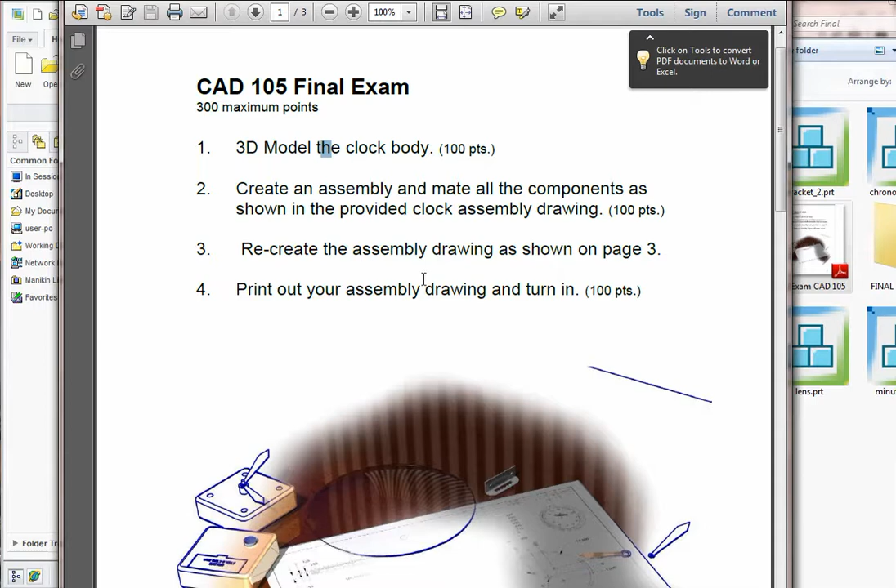The instructions are: model the 3D clock body with 100 points, create an assembly and mate all the components as shown, and recreate the assembly drawing shown on page 3. Print it out and turn it in.

So here is the clock body. You can see it's a little bit more detailed than what we worked on in the past with our midterm, but nonetheless it's not much more challenging. There's just a couple extra things to do on here.

So what we're going to do is we'll begin with that, then we'll assemble it as shown here and make this drawing.

To start off with, let's go ahead and create the clock body. The outer diameter is 8 inches, and it's going to be 0.75, so 3/4 of an inch thick. And it'll have a hole that's a 1/2 inch diameter through in the center. So start with the new part, and we'll call this the clock_body.

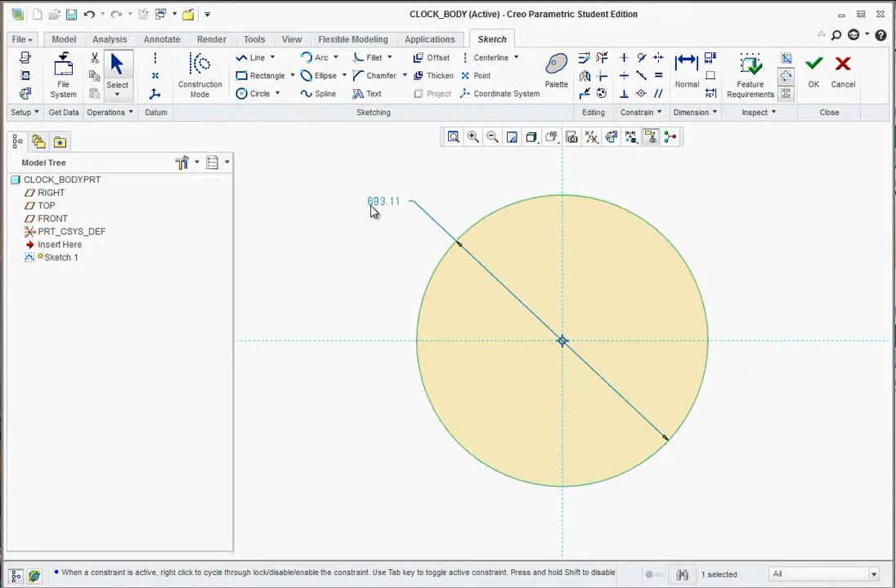Hit OK. Select the front plane for this one and start a sketch. Go to the front view orientation and proceed to sketch 2 circles. Go with the center and point circle. Draw out a large diameter there, and that's going to be 8 inches. Then draw a smaller diameter in the center, which is just 0.5.

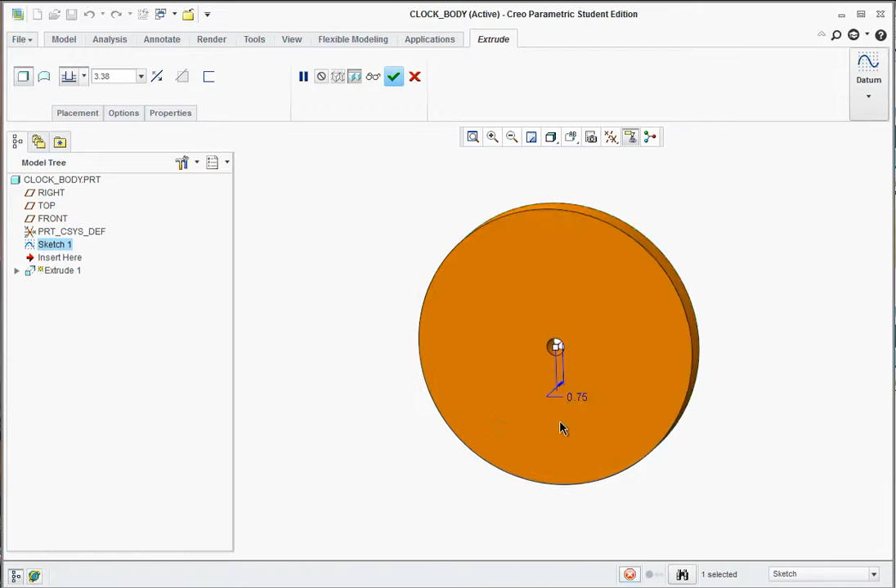Now you can extrude that, so hit OK. Go to Extrude Boss, refit here, and it only gets extruded 0.75 deep. Hit Apply. Right away, it's a good idea to put the fillet on, or the round. Click on the round, and the round is going to be 0.25. Select the outer edge, and apply.

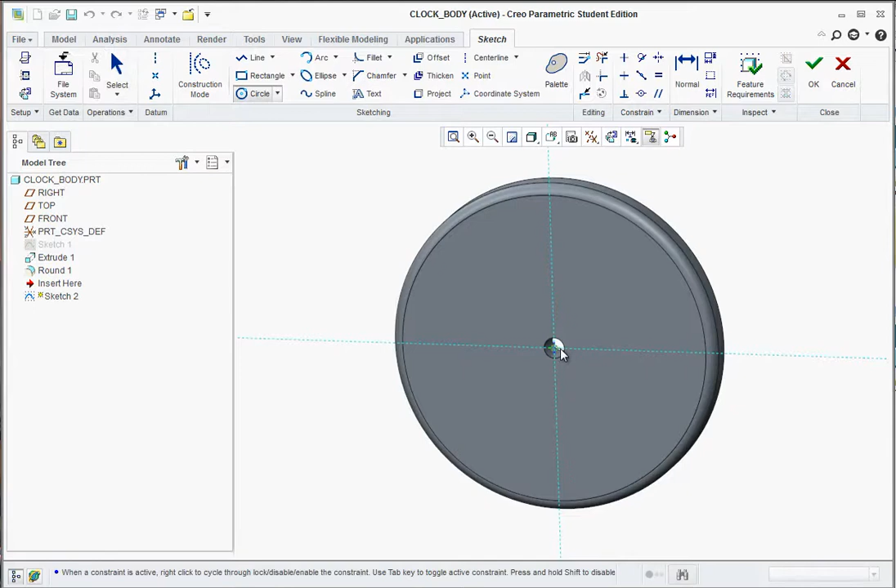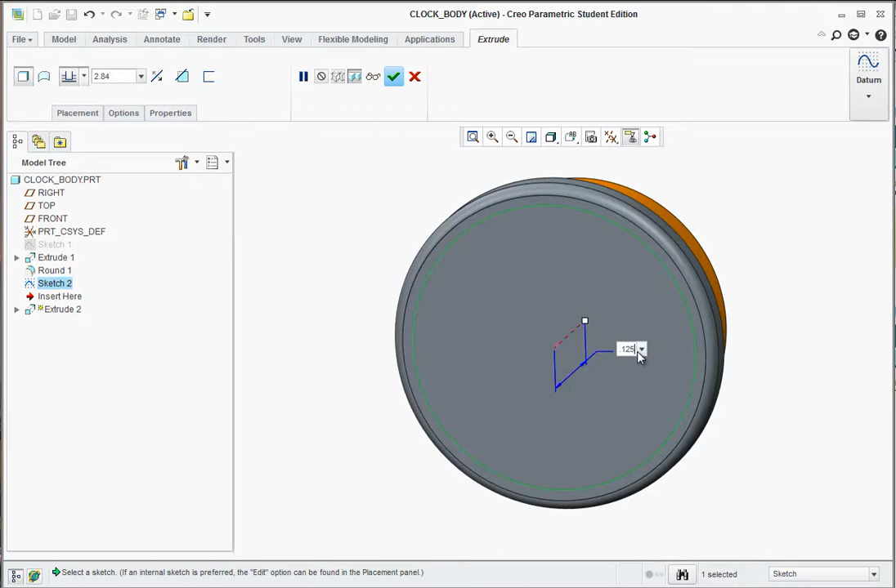Now select this face on the front and start a sketch. Draw the next diameter, which is 7.5 inches. And that gets extruded as a cut. So go to Extrude, reverse it, and we'll have to look at the print for that - it identifies it as 0.125 deep. So 0.125, and remove material. Let's try again, 0.125, hit enter to have it update, and the green check mark to apply.

The next diameter we're going to create on here is going to be 6.5 inches. It's going to be another depth. In this case, from the 0 marker, which is the very front face, it's going to be a 1/2 inch deep. So make sure it'll be 0.375 in the event that you have to subtract 0.125.

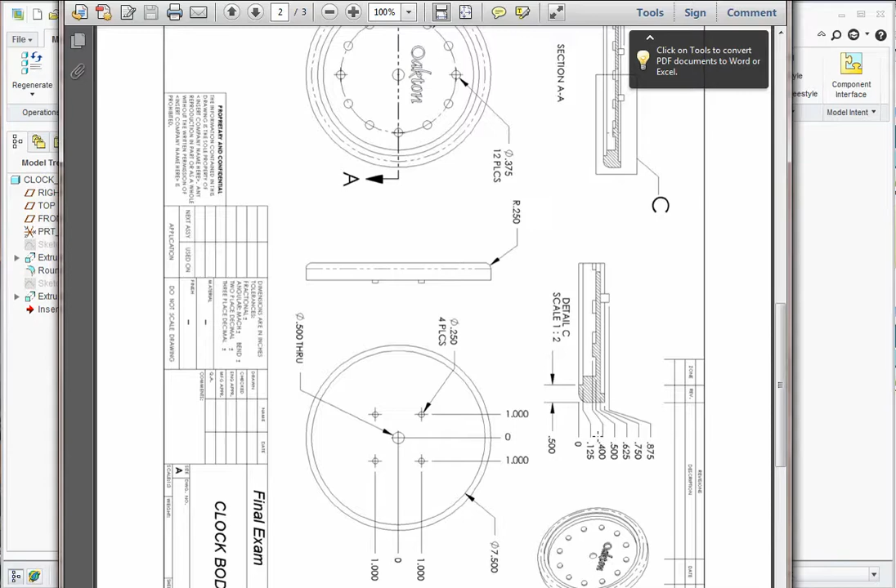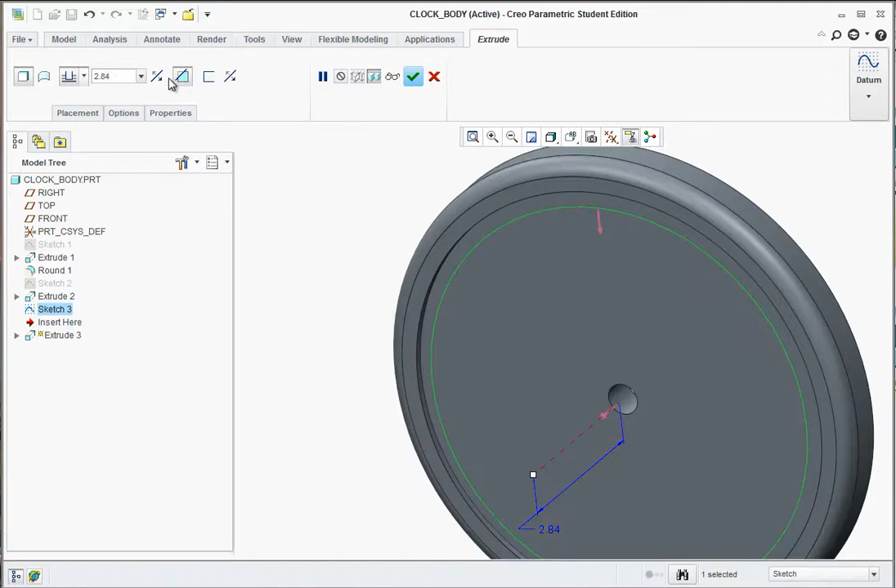So in this case, to make things simple, I'm just going to go to Sketch and sketch on this little ledge right here. And draw my next circle, 6.5 from the center. Go to OK, extrude, remove material, flip the direction. You could do that here, and that goes 0.5 deep from this front face. Remember, if you're sketching from the recess that's on there, subtract 0.125 from it. Hit Apply.

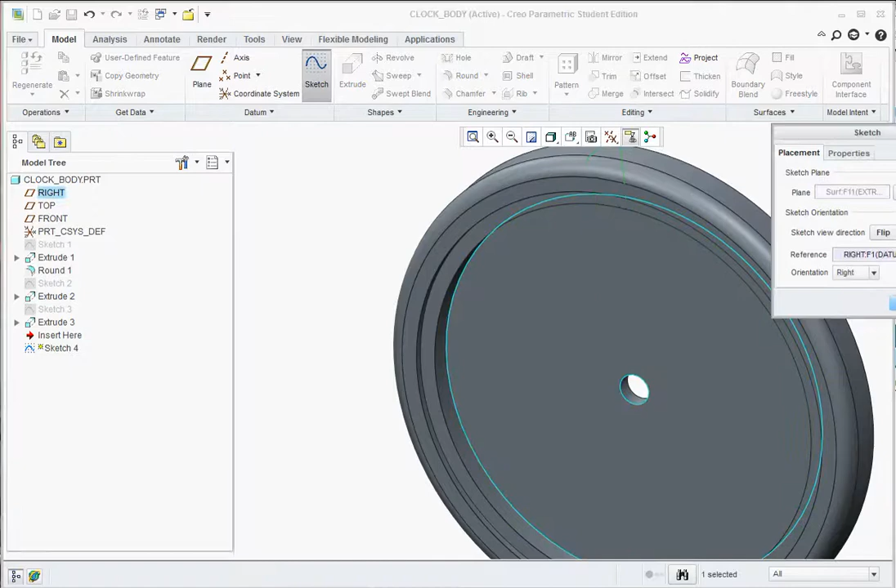Now we could go ahead and select Sketch and draw in on this surface. I'm going to go to normal to the front, and draw a circle at the 12 o'clock marker. That's going to be 0.375 diameter, and it's going to be offset 2.5 inches from the center. Now you can hit OK and extrude that. It gets extruded only 0.1.

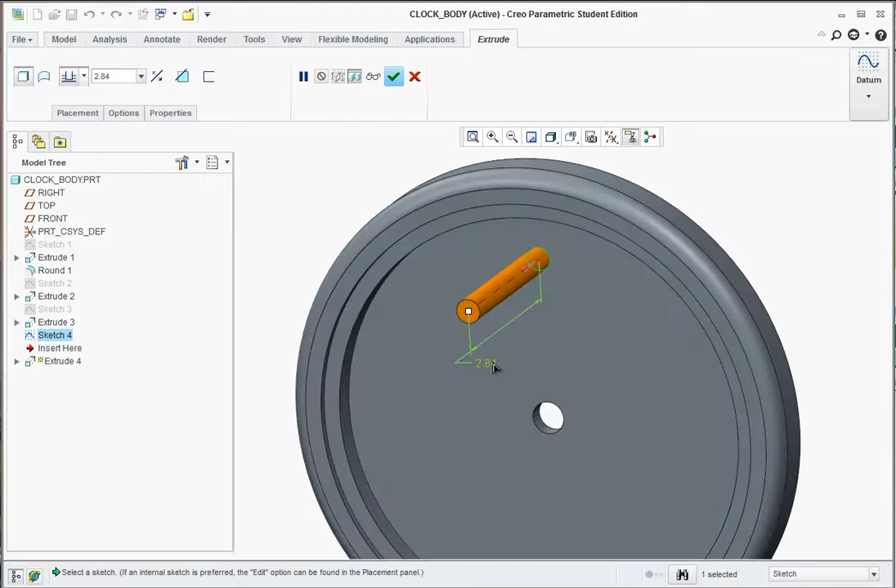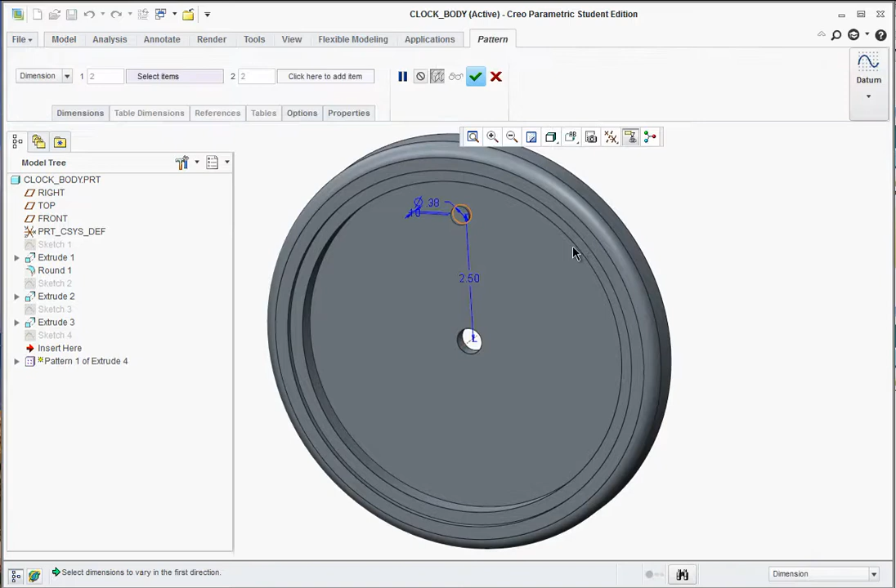Now we need to make the circular pattern, so you're going to have to turn on your axis display, and now you could go to select this feature here and go to the pattern. Make sure that's selected, and go to pattern, select pattern. Over on the upper left, make sure it's select axis and select that center axis. There's going to be 12 markers, so it's 360 divided by 12. You can hit enter, and it gives you 30 degrees. Hit the green check mark and apply. At this point, you can turn off the axis display.

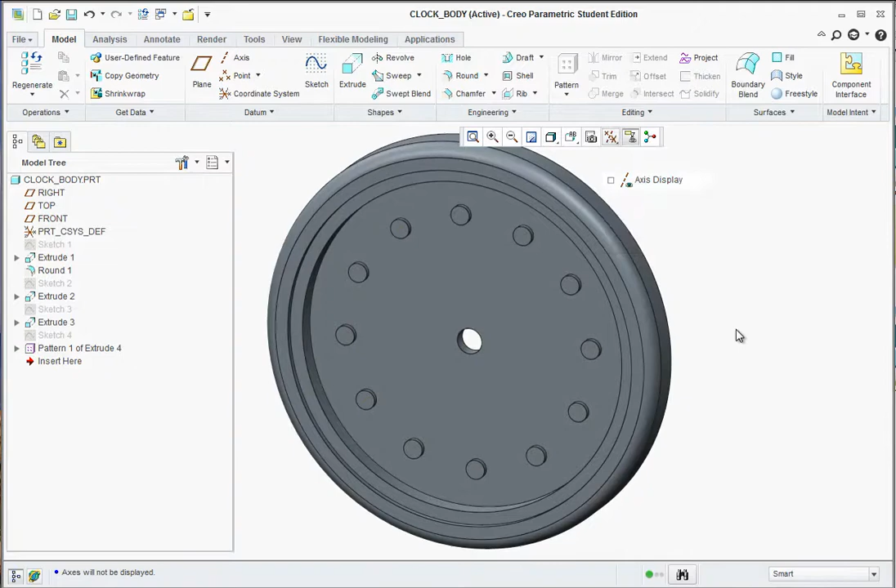So now the front of the clock's done. Now the back needs to be addressed. For the back of the clock, we can see here it's going to be 7.5 diameter, and it's just going to be 0.125 cut depth.

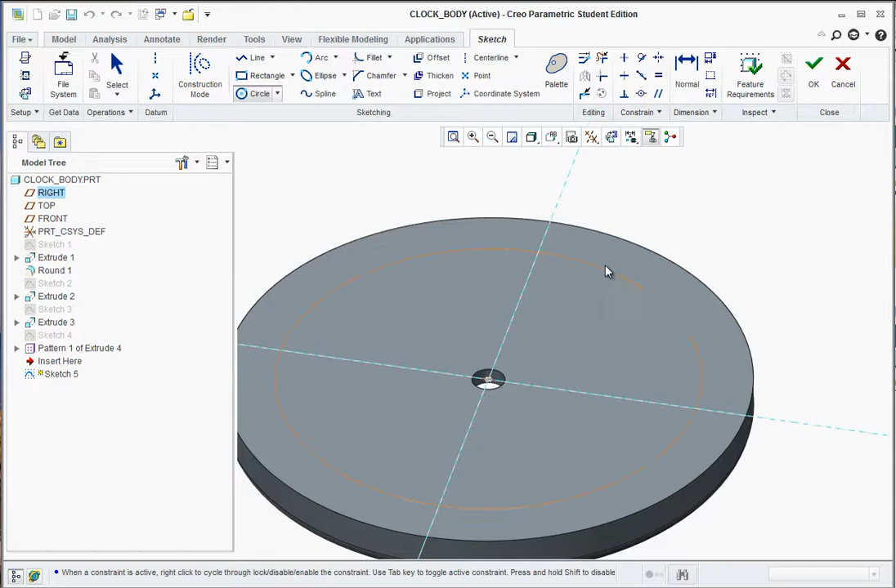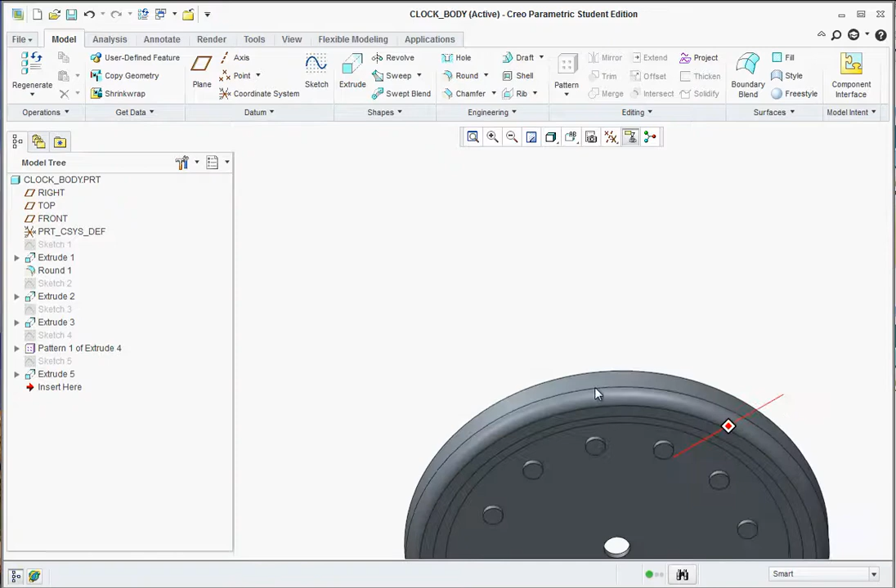So select sketch and select this back face. Start your sketch and draw the next circle at the center and make that 7.5. Go to OK and extrude, reverse it, remove material, and make sure this is set to 0.125 deep. Hit apply. If it cuts through, that's an indication that you have one of your depths off. Most likely it's that 1/2 inch deep for this level here, which you'd have to fix the extrude to by editing the definition of it and change it to 0.375 most likely.

Now we need to select this face again and start a sketch on that pocket, that recess. Let me just rotate here. Okay, and I'm going to go ahead and select the centerline tool, draw off a vertical and a horizontal centerline. Draw a circle between those two and make it 0.25 for the diameter and 1 inch off each edge.

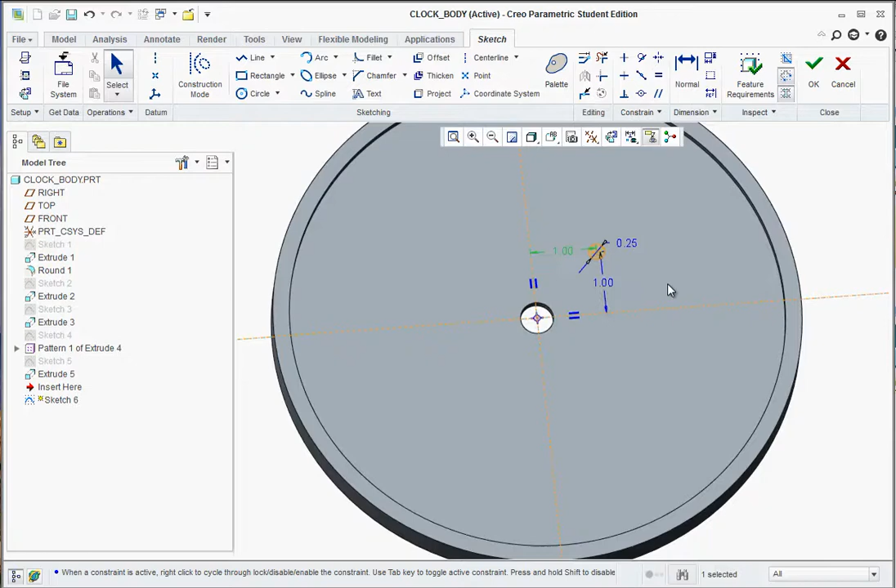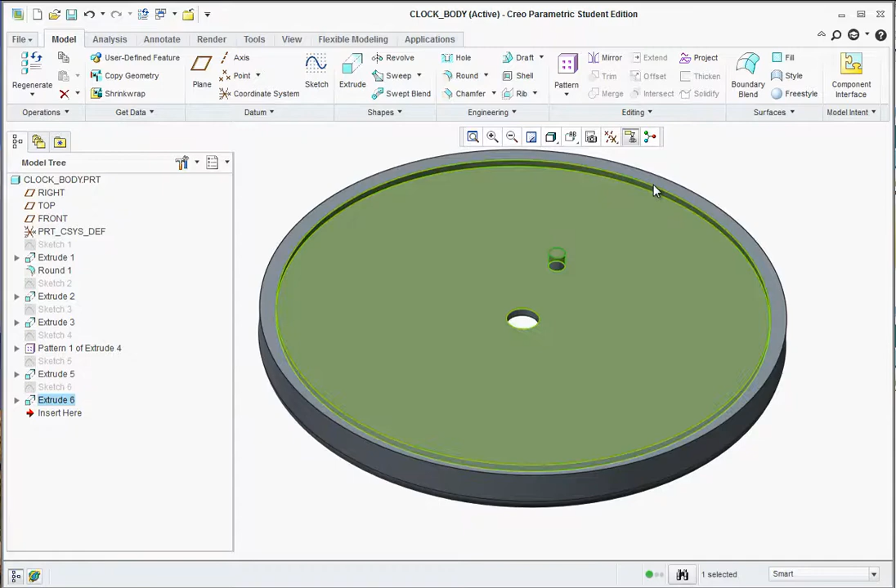Extrude that, go to OK, go to extrude, and that gets extruded 0.25 high. Now we want to mirror that across. We could have used a sketch mirror as well, that would have been pretty easy. In this case, we just select the post, go to mirror, select your right plane as a mirror plane, and hit apply.

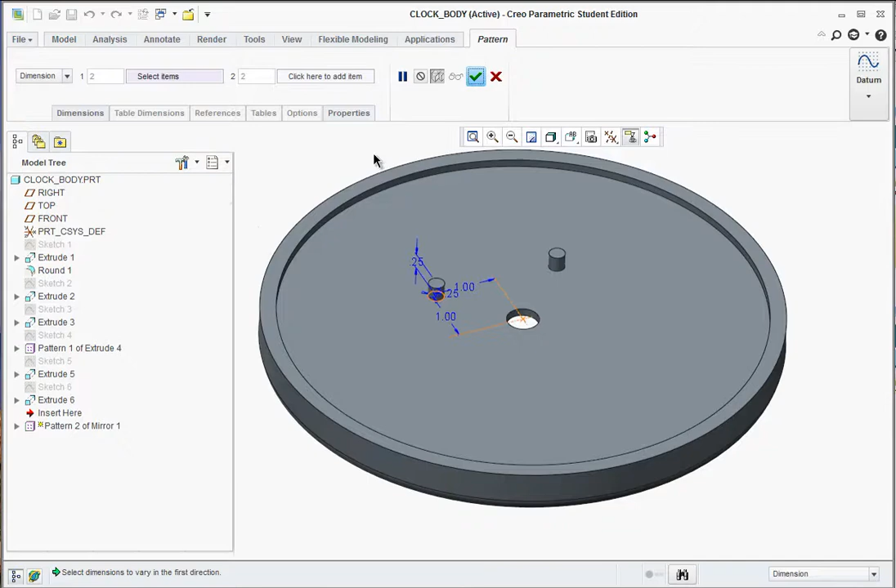Click on both posts holding control. Unfortunately, let's just do one at a time. Let's see if we could just select the mirror. Go to pattern, not pattern, cancel out of there. Go to mirror and select the top plane. Mirror across. It's going to make us do this one at a time unless we group them.

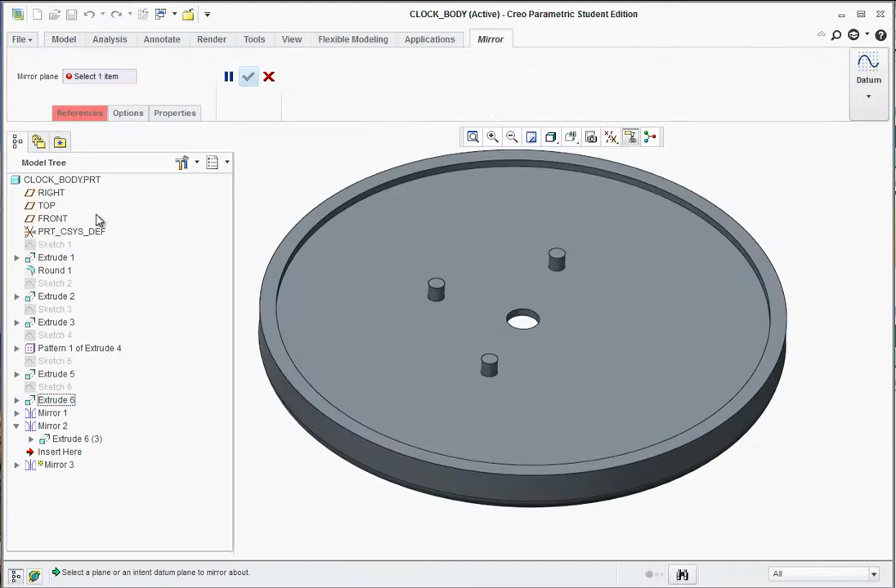But I'll go ahead and select Extrude 6 there, or this one here. Go to mirror and I'll select the top plane for that one. Hit apply. Alright, the clock body is done.

Let's move on to the next part, or the assembly I should say. Go to File, New, Assembly, and call it Clock. Hit OK.

Just going to refit this to the screen there. And now we're going to go to Assemble, and we should be able to see the clock we've been working on. It should be found in Session.

Click on In Session and find the clock body. Hit Open and set that to default. Hit the green check mark.

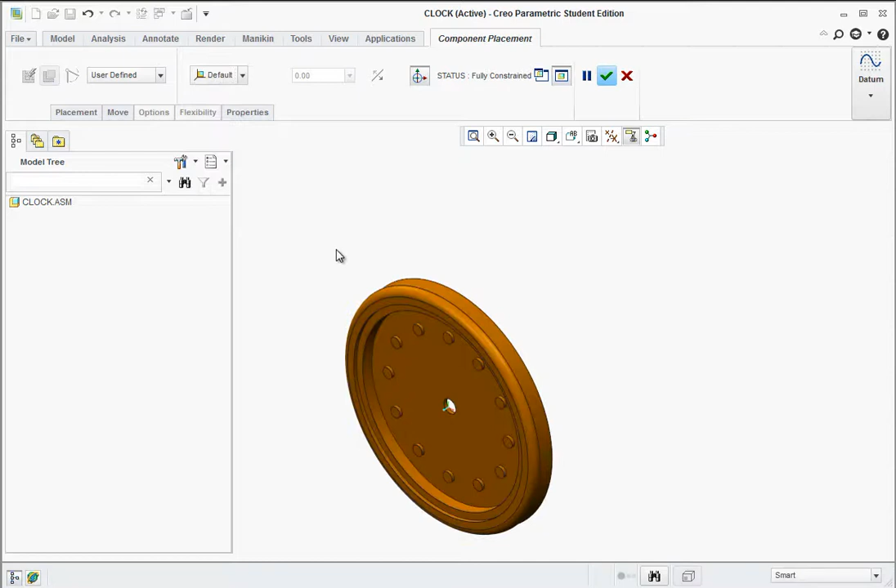Now we need to assemble the other components. So go to Assemble again, and this is where you're going to have to browse for the sample files and Final folder and find the chrono housing.

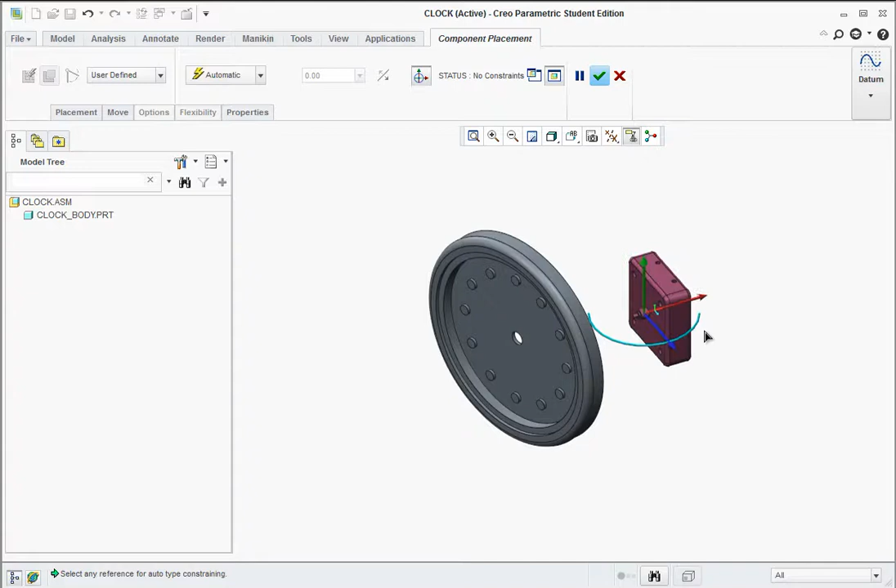Hit Open. Now using this, you could grab these manipulator handles and get it close, even rotate it around, so you kind of have it in position ahead of time.

And now you could select this cylindrical face here to this hole. Align that. Then this face here - hit refit if you have problems with rotating out of the screen.

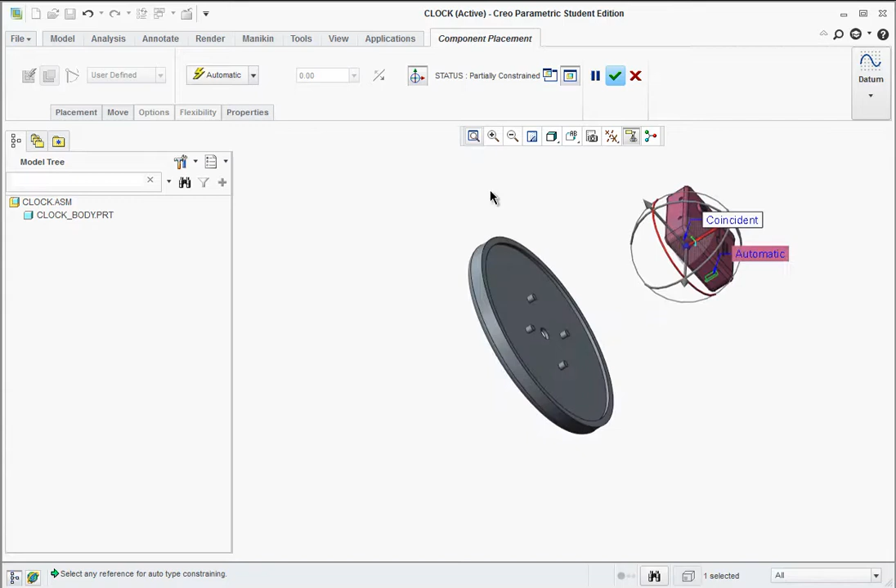And then to that post on the lower right. And then keep having to rotate. Unfortunately, it's not refitting very well here. I'm going to select this face.

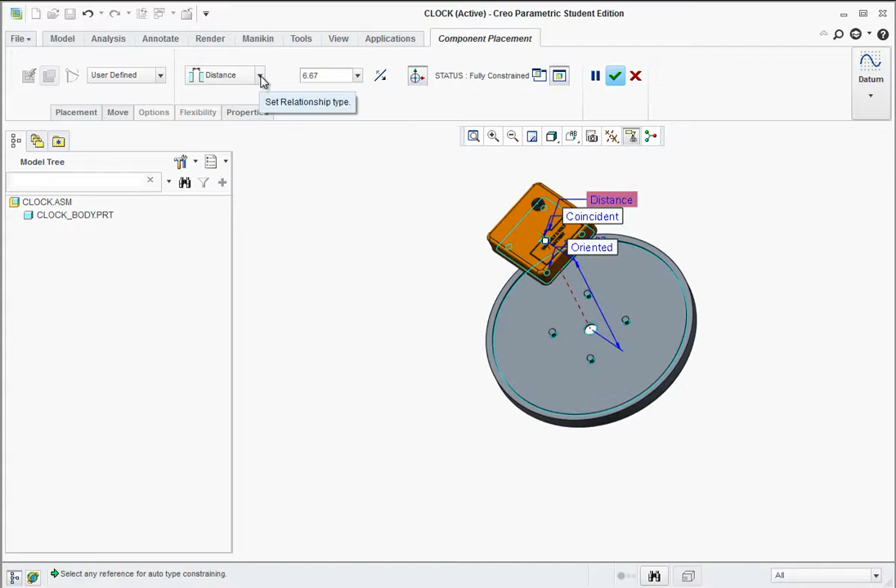Select that face. Now, instead of distance, I want that to go coincident. So let's mate up against there. Let's go to the standard orientation here.

Okay, now we could go ahead and make sure that the post holes are on the top, so you're in good shape, and you can continue adding components.

So go to Assemble, let's bring in the bracket, hit Open. And again, we can move this to the back where it needs to be.

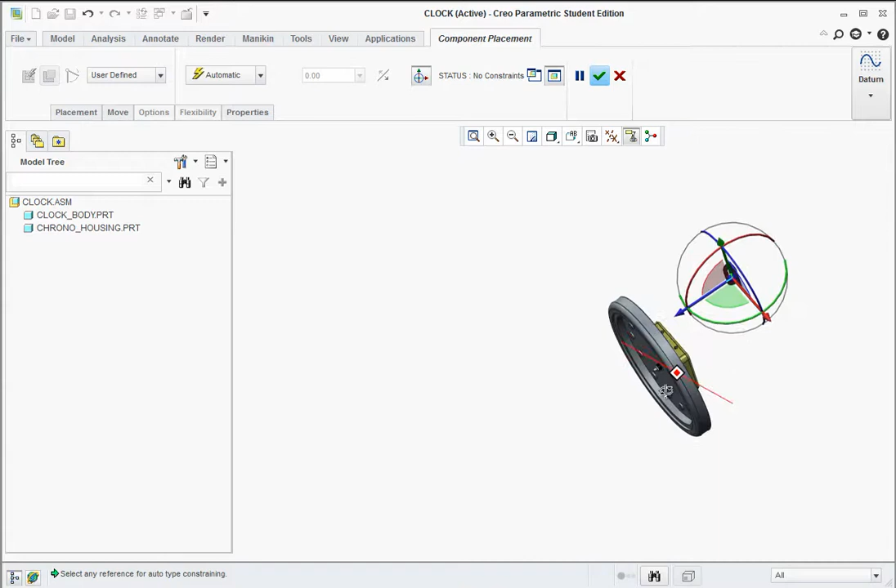Okay, and I'm going to go ahead and rotate it around, grabbing the little rings to get it close to the same way I need to have it over there. And I could select this face here to this face.

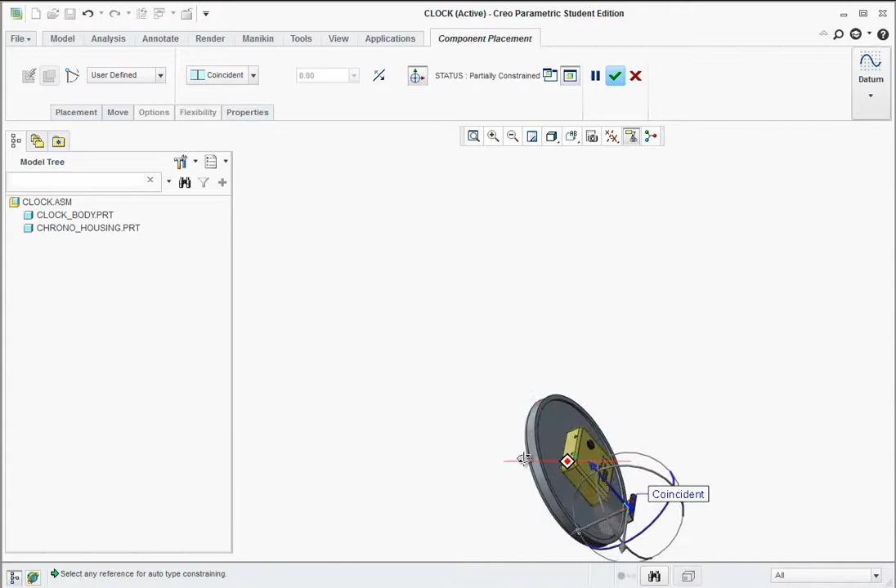Now if it's in the part there, we could just grab the manipulator handle, drag it up, and zoom up, and now we could select the underside face and align it to this face.

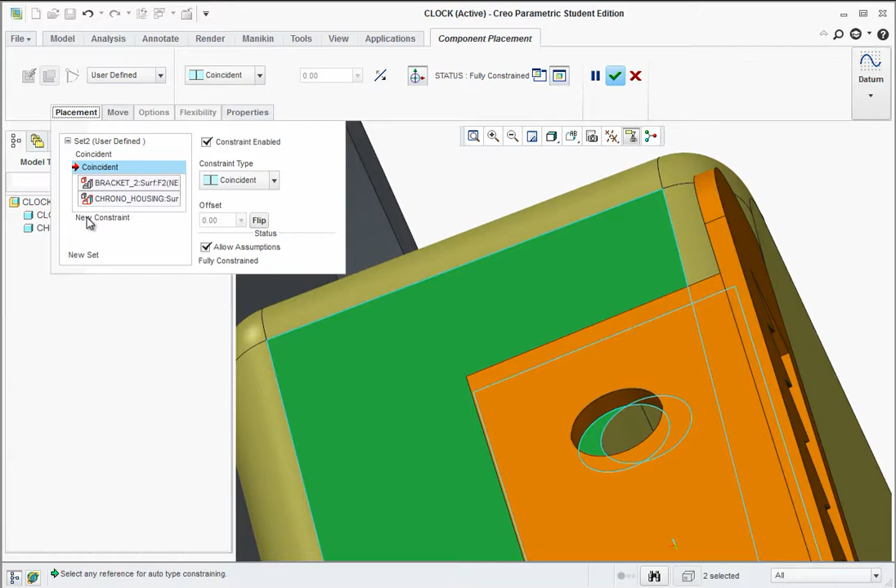And finally, this hole - oops, unfortunately grabbed the wrong face. Let's go over to placement. Let's go to new constraint, this face to this face, and apply.

At this point, we're going to go back to assemble, and we're going to bring in the bolt. Open. And move the bolt over.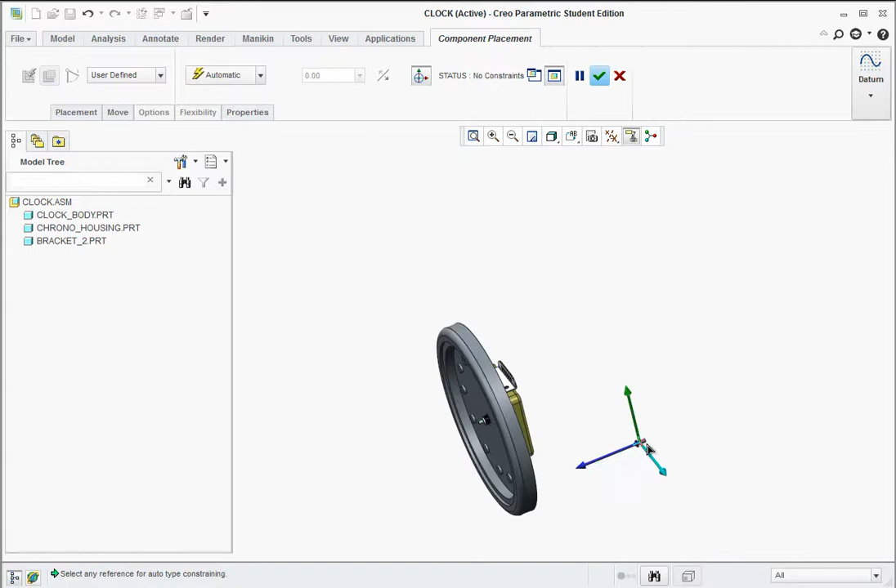Close in proximity to the hole. Now we can select the length of the bolt. And actually, we'll rotate it somewhat closer into position, and then select that hole there.

Okay, we've got to bring it up. Now rotate this around, select that underside face of the head of the bolt to connect to this top face here, and hit apply.

Let's bring in another bolt. Assemble, bolt, hit open. Again, get that close in proximity to the assembly and where you want to drop it.

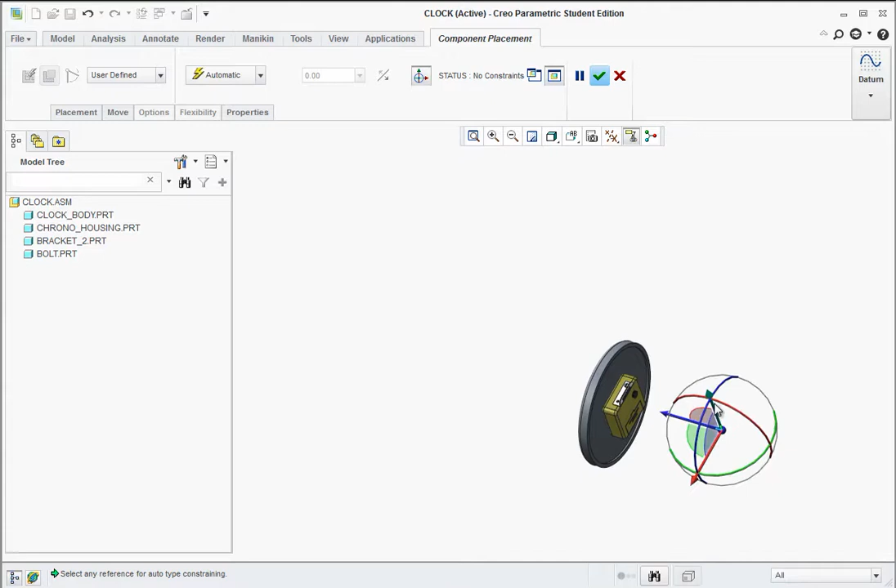Rotate it. Select the length of the shaft to the hole.

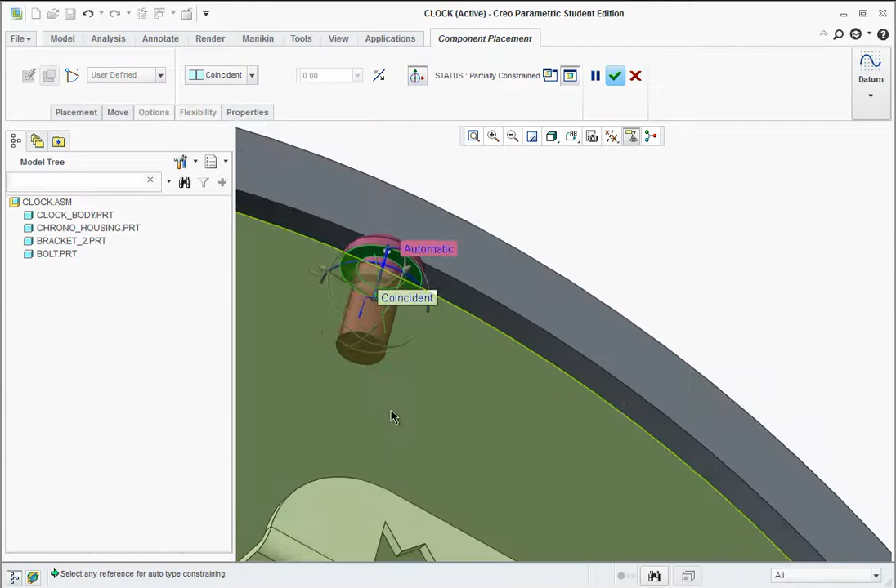Get underneath that surface to this top surface of the bracket. Hit apply.

Go back to default orientation, and now we'll bring in some of the other components. Assemble, and let's bring in the hour hand.

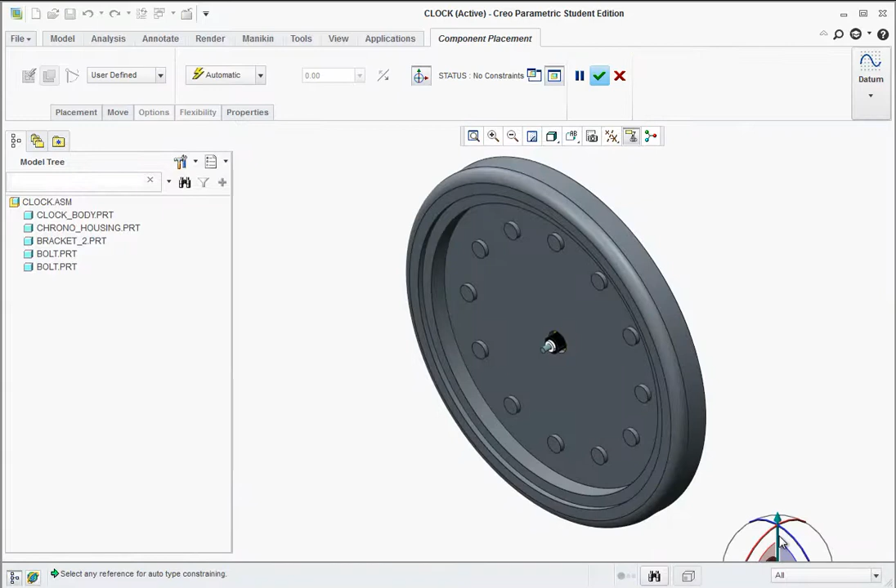Could rotate that a little bit. Bring that up. And same thing - select the hole here, and then select the white sleeve.

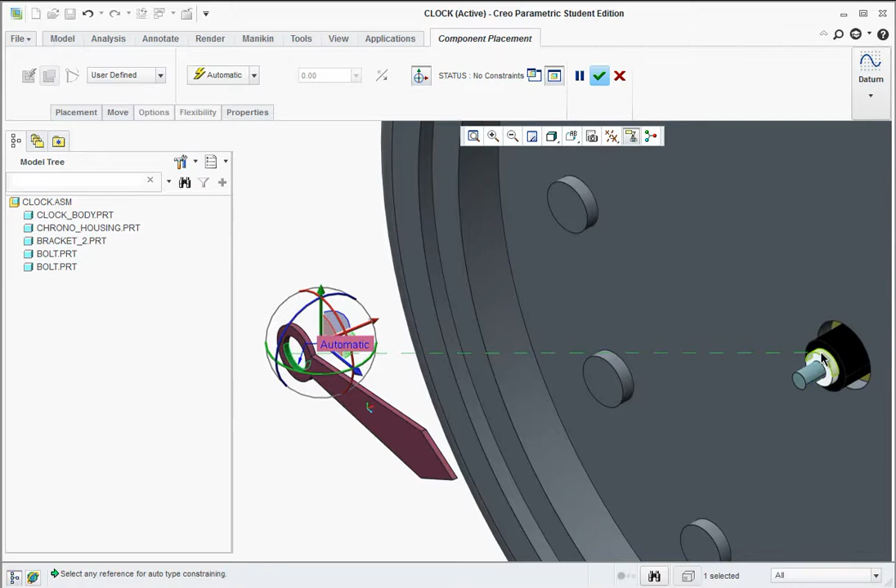And then you can select this backside face. Remember, you could drag it out if you need to. And then the black sleeve surface here on the flat one.

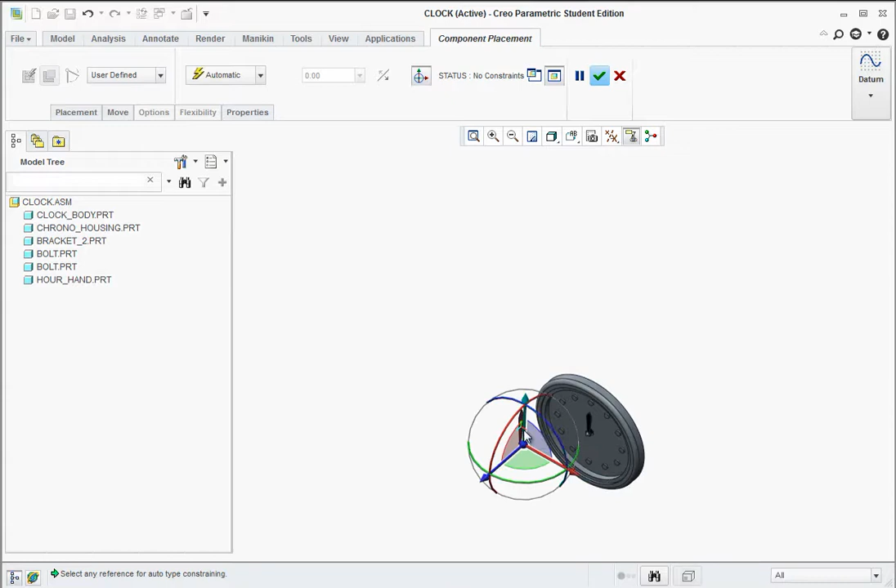Apply. Proceed to bring in the minute hand now. Again, get it close. Rotate it around a little bit.

Select the hole, and select the gray sleeve. Let's drag this out a little bit. And maybe out a little bit further.

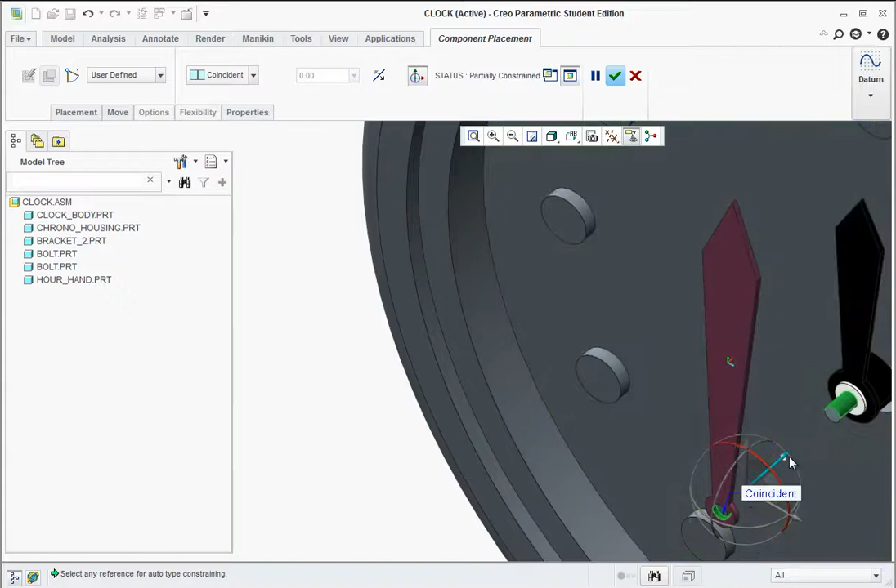So we could rotate and get that backside surface. And we want that to go coincident to the white surface. Hit apply.

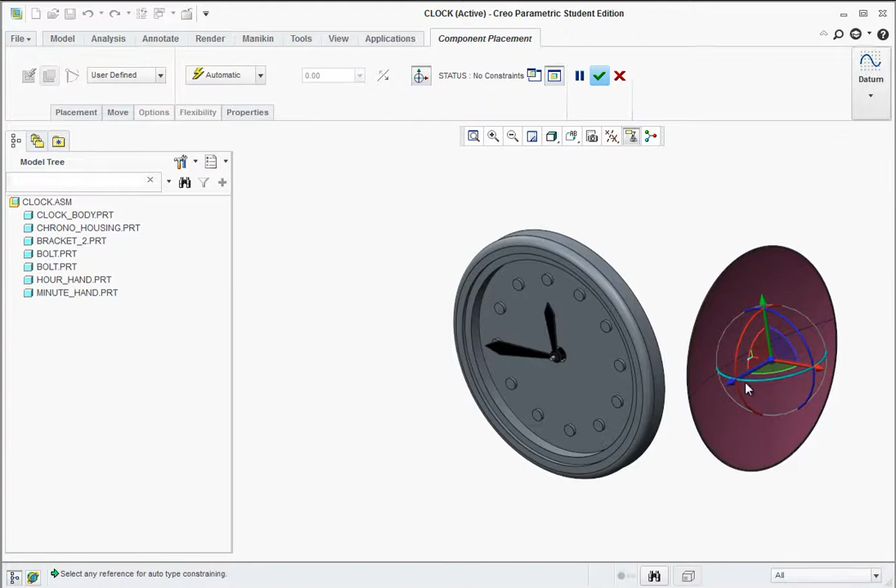And now for the lens. Assemble. Find the lens. Bring that over here. Rotate it around a bit.

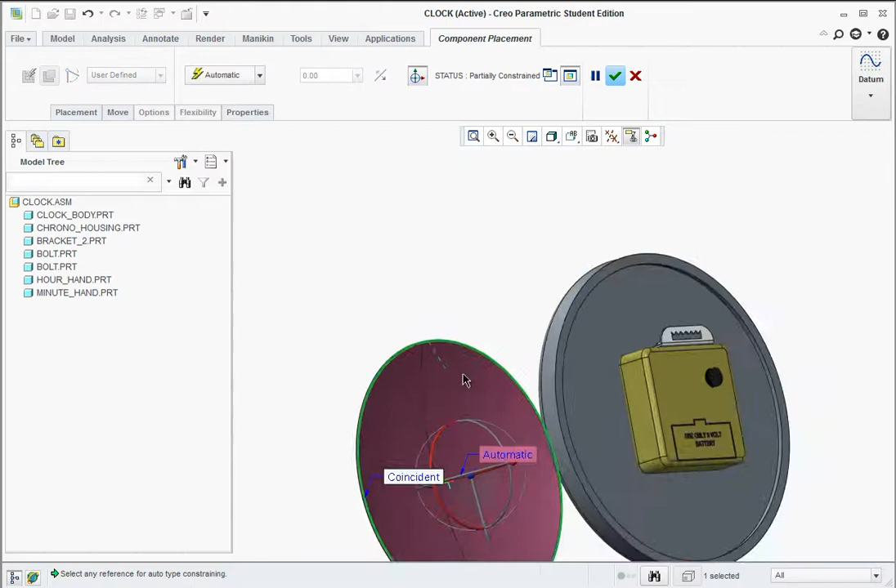Select the cylindrical face of the lens to this face here. And then this face, this flat face, to the flat face here on the ledge. And make sure that's coincident.

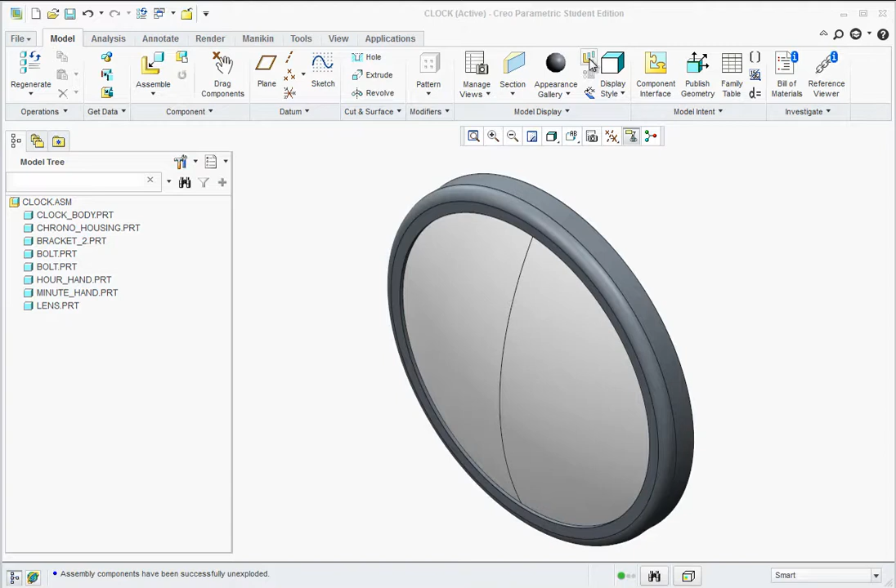Alright, now we're going to go ahead and explode this. For explode, it's right up here, click on explode. And then down below there's edit position, so you can click on edit position. Then you just select the part that you want to move, and it gives you a manipulator handle, so you could drag it in any direction. And if you want to select more than one object, you could hold Control and drag them on as a group.

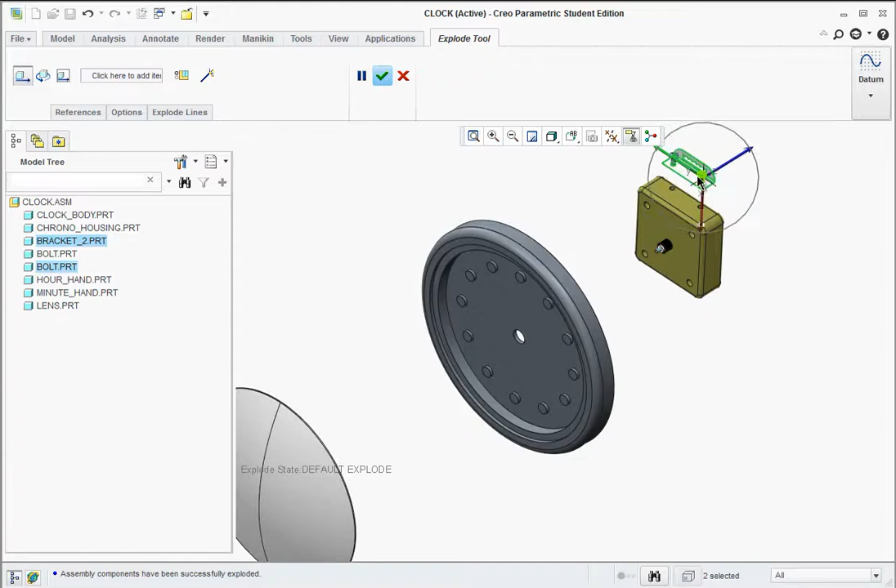Drag that up, click on the bracket and drag it down. And just make sure you bring out the hour and minute hands. Make sure you move those out and then split them up so they're not touching.

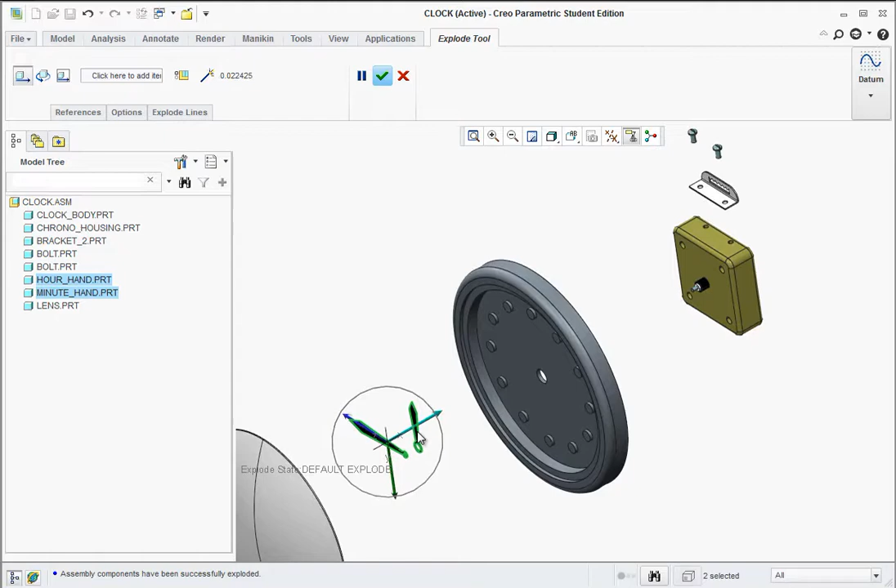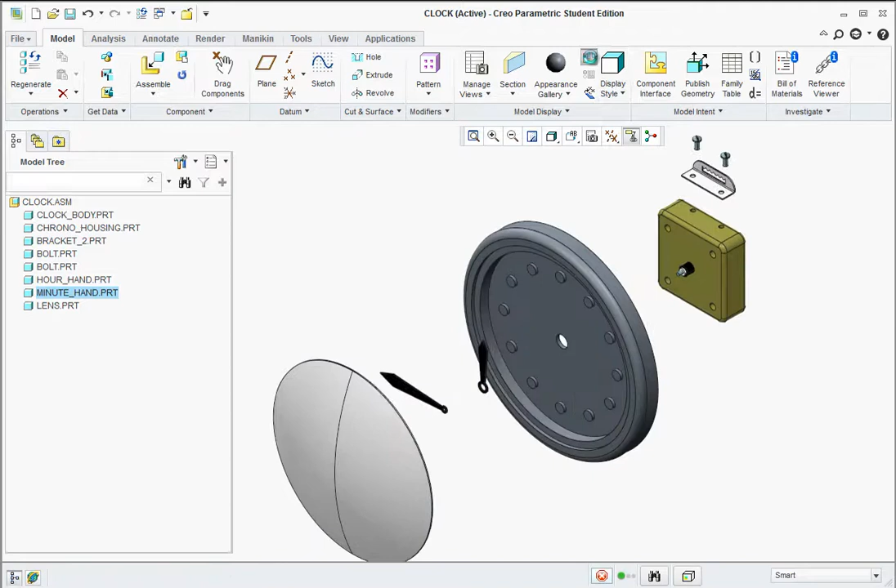Then you could click on Unexplode View by clicking on the Explode View again. Okay, and so the assembly's done. That's worth 100 points, so we're on the last leg of this.

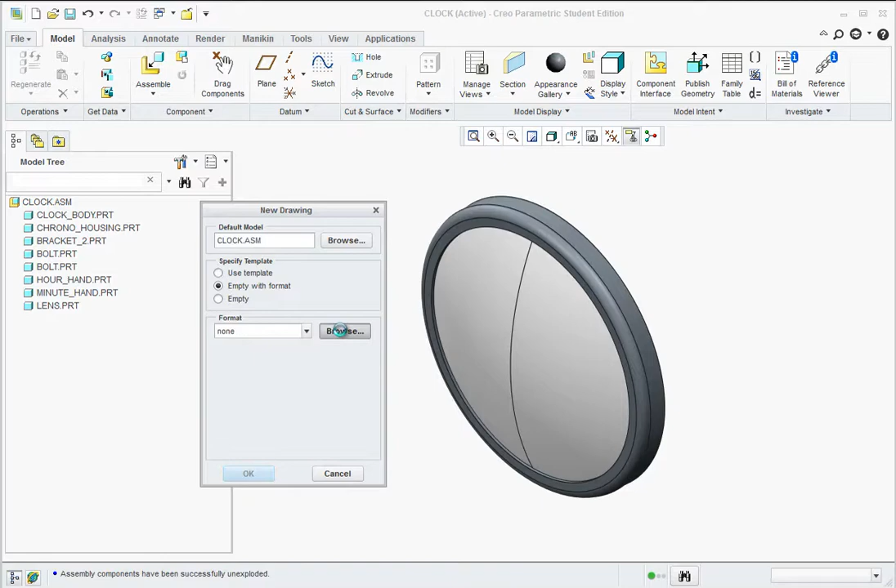Let's go to File, New, Drawing. Call this the clock, hit OK. You could go with Empty with Format and browse for the A format.

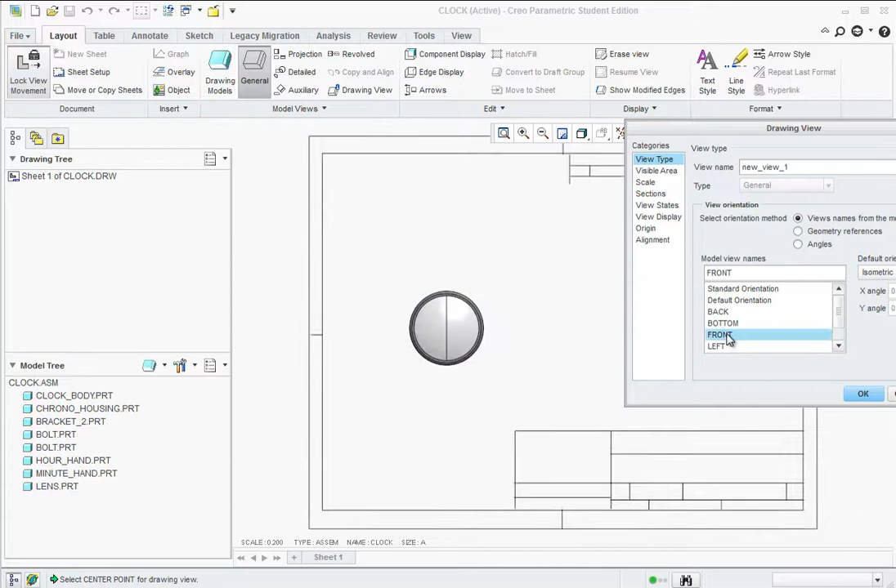At this point, go to General, hit OK, left click to drop in the clock, and let's bring in the front view orientation. Under View Display, make sure that No Hidden with Phantom Lines for the tangent edges is turned on. We could also adjust the size, although the size I think actually works really well. If we go to Scale, 0.2 is good.

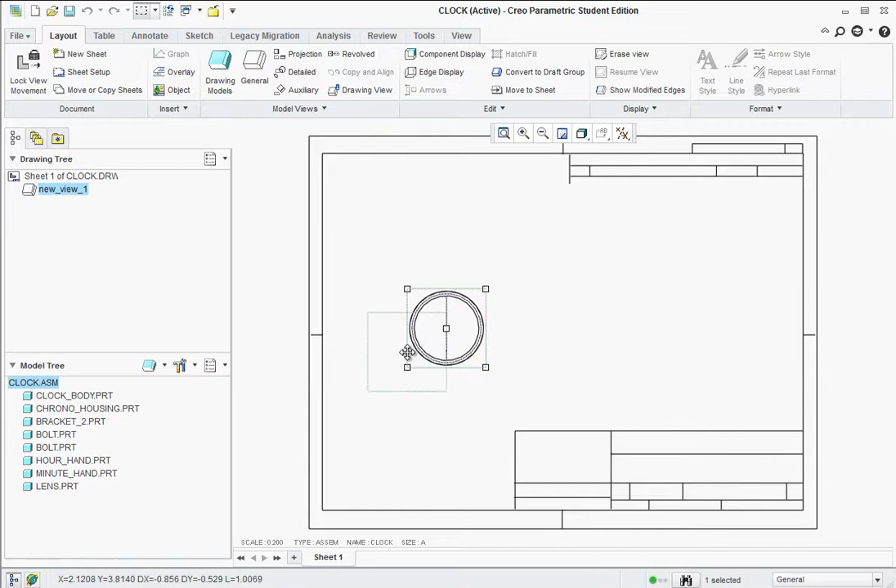Hit OK. Now if you need to move the view, remember you have to turn off Lock View Movement. Then you could click on it and relocate it. If we look at the drawing, what you need to do here, I'm going to go ahead and rotate this view. We need to recreate this drawing.

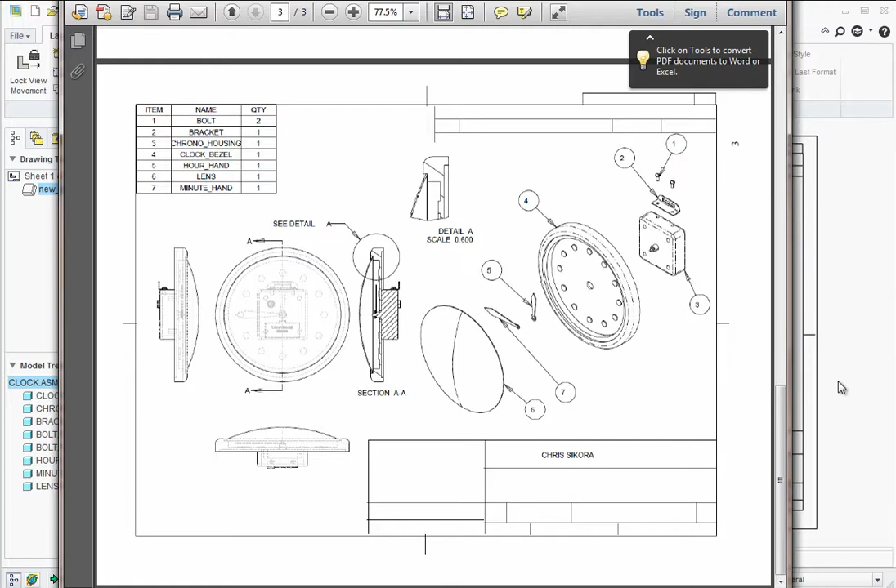So we have a front, left, bottom, section, detail. So there's our front, click on it, go to projected, left, click on this again, projected bottom, click on projected again, click on this, right, and now we're transform these.

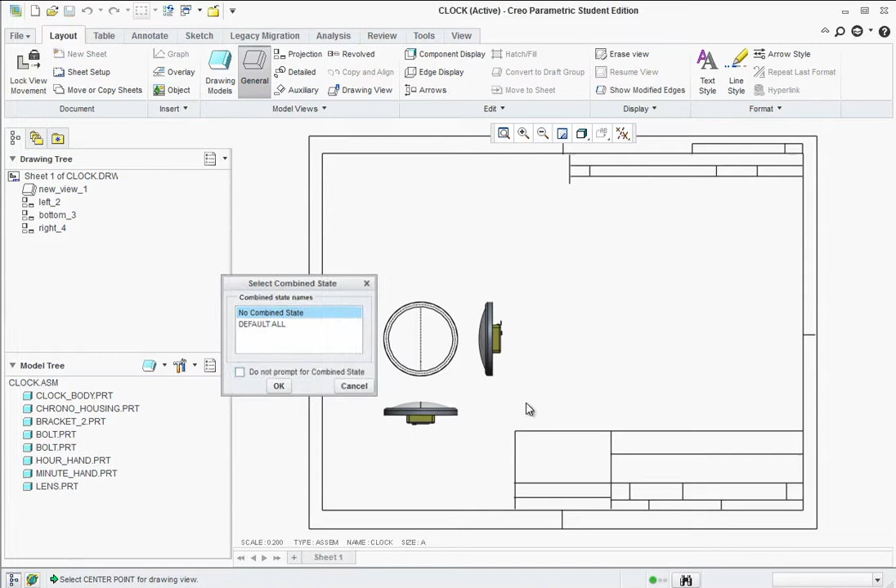And then also let's bring in a general view again, hit OK, left click over here, and we want the exploded view. So if we go to View State, click on Explode, and View Display, just hit yes, and make sure that it's set to No Hidden, Phantom Lines, and hit OK.

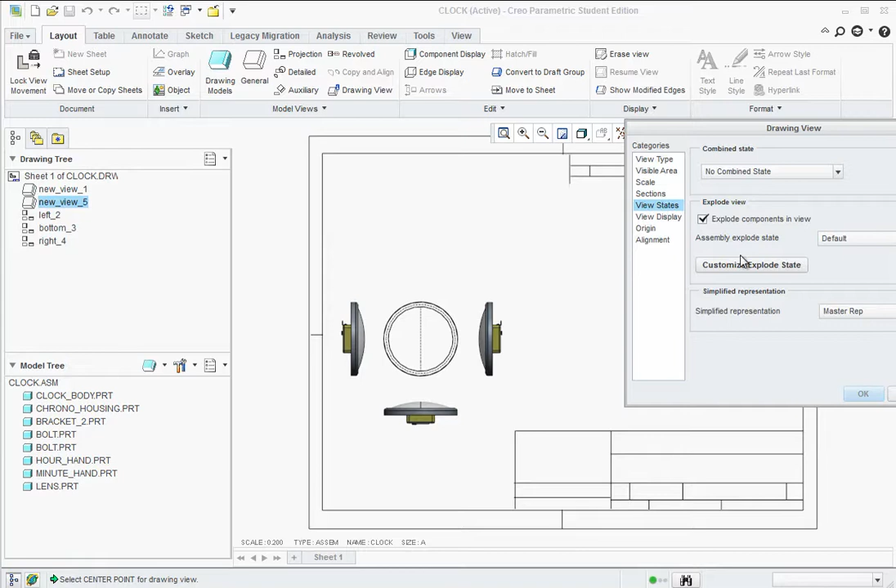In this case, I actually forgot to save my exploded view. So we can customize it from here, but my suggestion is actually not to. So what I'm going to do is I want to go back to that, and I will fix that in just a second.

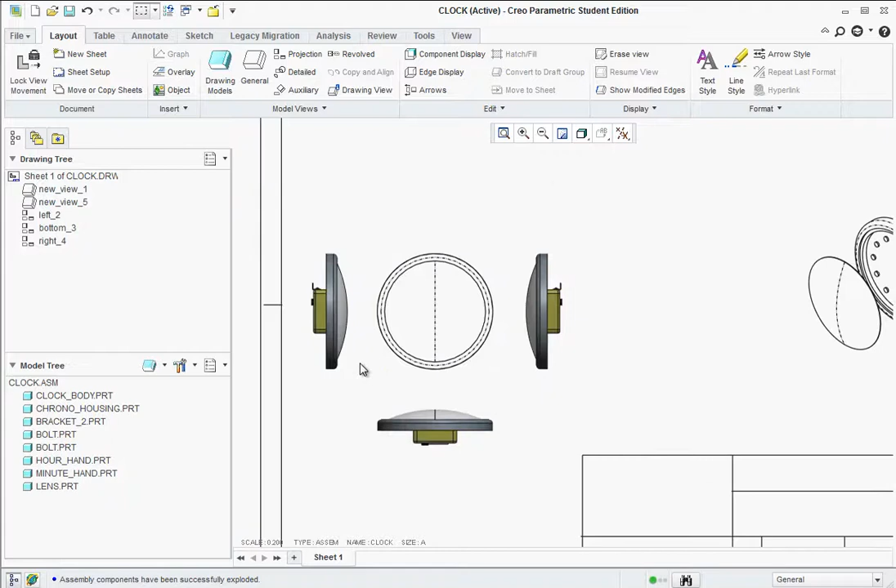Anyway, with these views, we could hold Control and select these views, and then right click and go to Properties. Then we could set them all up to look the same, so no hidden, phantom lines, hit OK.

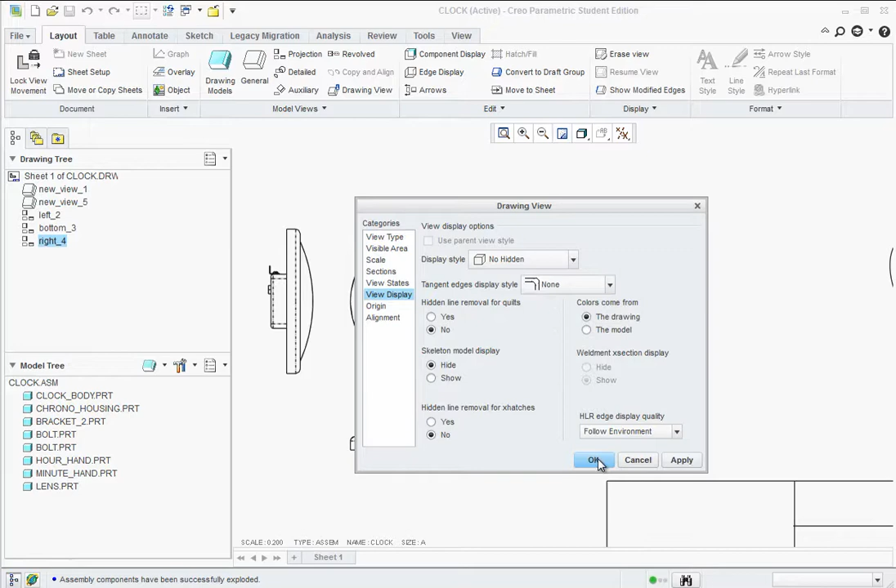Let's make a section view though right now. Actually, this one does not - under View Display, should have none for phantom. And actually these do have hidden lines, I forgot about that. So these three, right click Properties, and you do want hidden.

Okay, now to make the section view here, double click on this view, and we're going to go to Sections, 2D cross section, Add. And here's this little box that comes up here, just hit done. Type in A for the label. And then over here, it's looking for a plane.

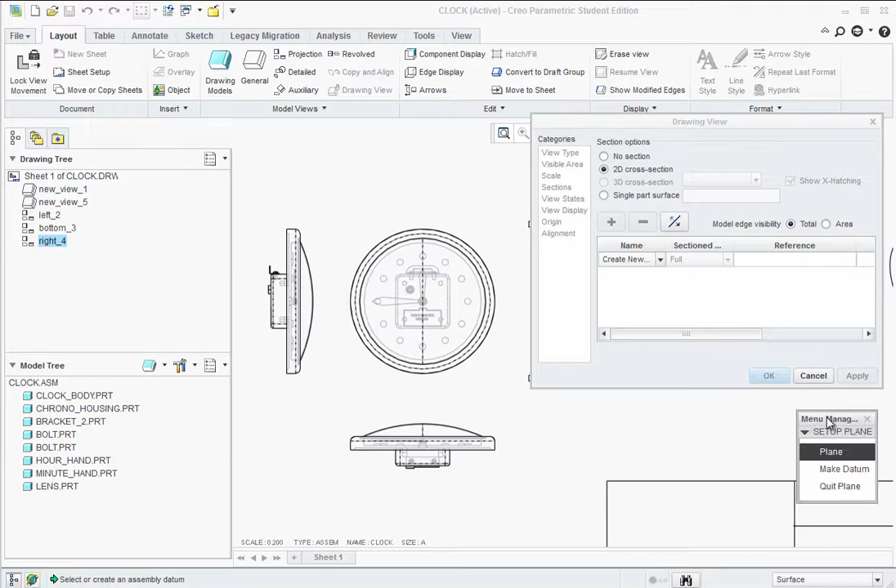This is where you could turn on your planes. Click on this little button here, turn on plane display, and refresh the screen. So here's refresh, and now you just select that assembly right plane right here down below. Click on the text and hit apply and close.

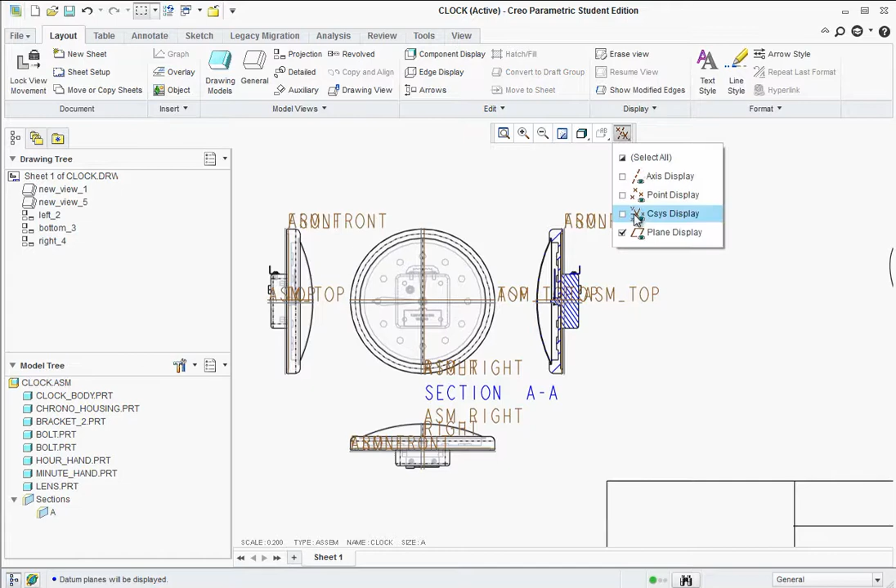Now we could turn off the plane display again and just zoom out or refresh the screen, and there's our section view.

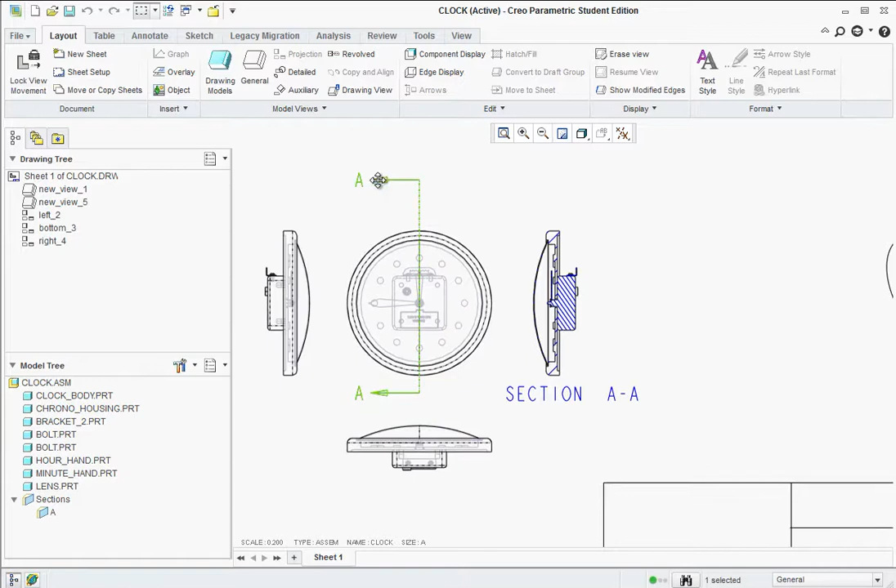Make sure you add the section view arrows though. Right click on this view once, then right click and add arrows, and then click on this view to add the arrows to it. You could at this point click on the arrowheads and drag them in so they're not overlapping on any other geometry.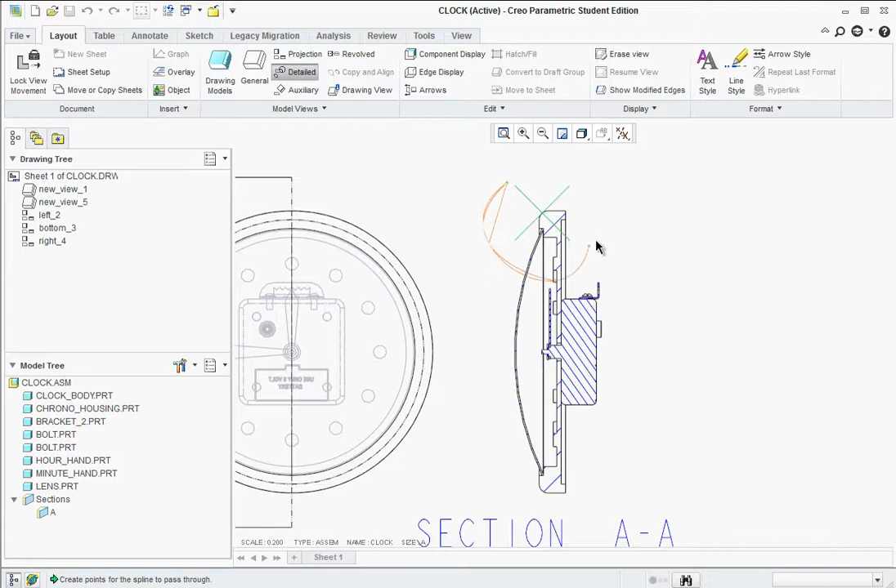Now for the detail view, go to detail, click in this corner up here at the top, and drag a circle around it. Actually, you're drawing geometry. Middle click, and then left click to drop the detail view. Make sure you center the text, and make sure that this isn't overlapping any.

We'll go ahead and finish this off, then we'll address this issue. Let's click on this view and go to table.

Unfortunately, I won't be able to reproduce this here because this isn't the same license agreement we have at the school. But what you're going to want to do is go to table from file, and you should find the BOM table located in that sample files folder. Click on it, and you should be able to hit open, and then it will drop in the upper left corner.

You'll get a message about home licenses, unfortunately, because it was created on a commercial version at the school. Hit OK, and unfortunately I won't be able to bring that in and simulate it here, but that would bring it in and you could click on it.

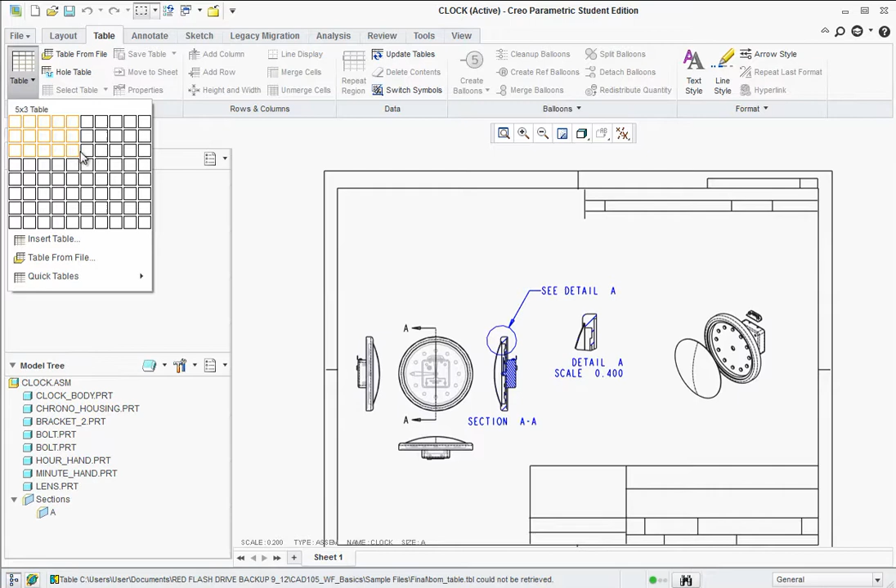You could right click and change the column widths and height. Just to show you what you can do, if you bring in a sample table and it comes in rather large like this, while it's still selected, right click on any cell and you have height and width options. You can turn off the automatic height and width adjustment, and put in the height, say 0.2.

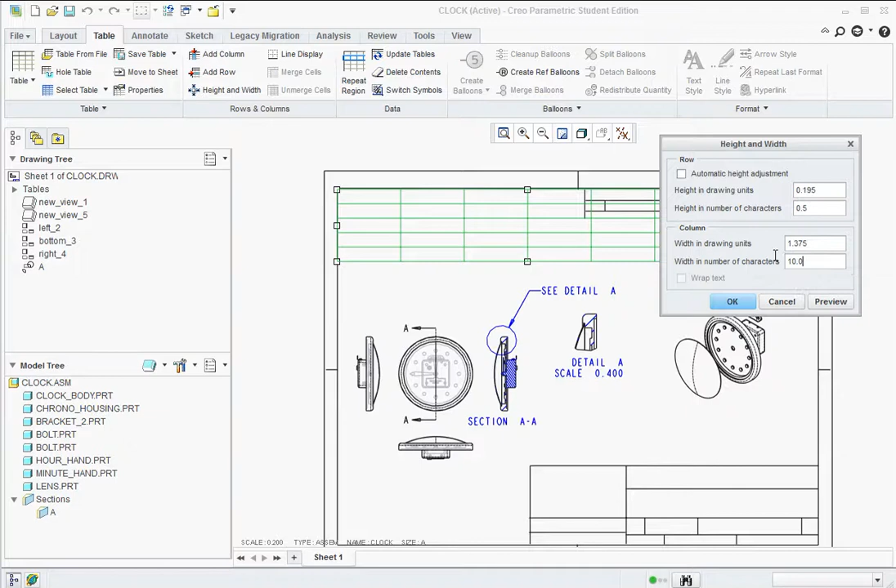That will bring down the size a little bit, the column. For number of characters, let's say we want 6. Preview it, you see how it gets smaller. So you're able to go in there and transform that to make it fit properly. The table from file will work just as well.

Now we'll put in a note here. Let's go to annotate and go to note, then just hit make note. Click in this little area to drop the note, and up here you just type your name. Then hit the green check mark twice, and it should drop in. Then hit done and return.

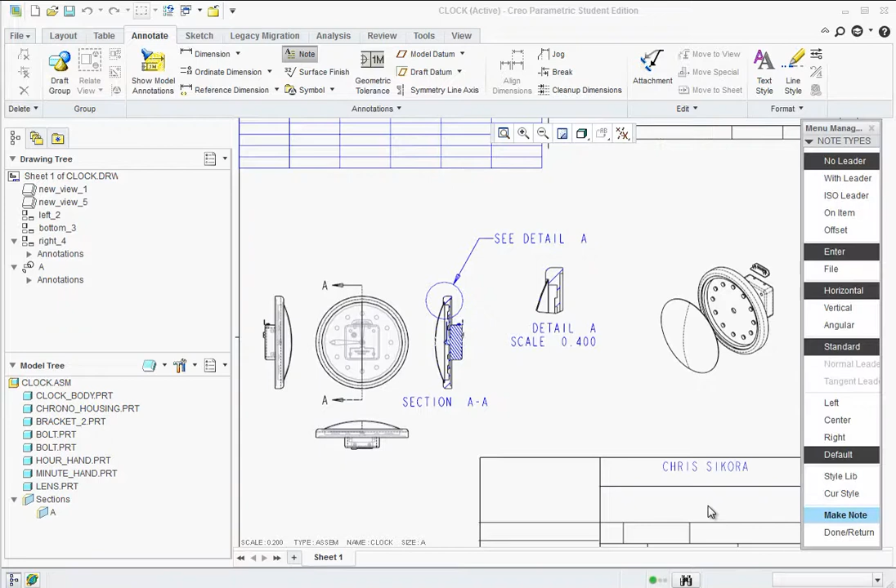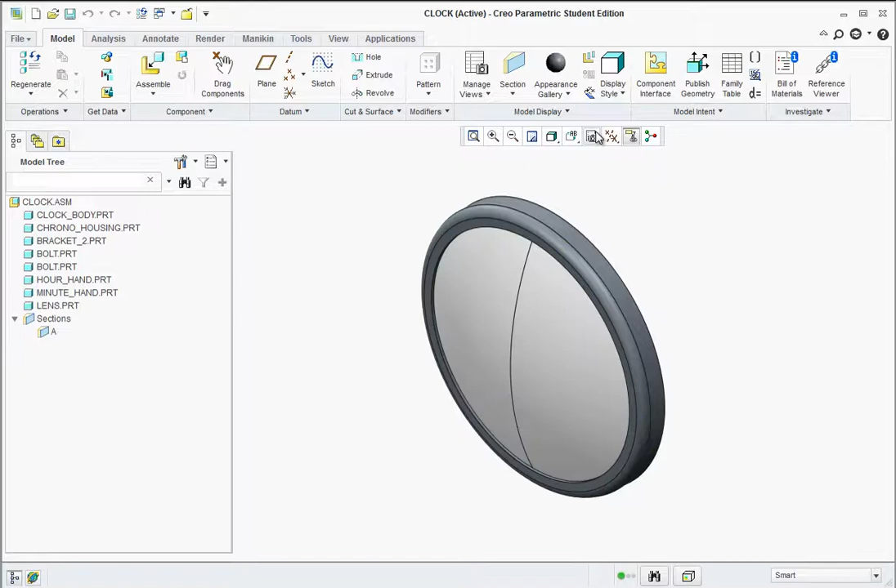Now we have to address this assembly. If you right click in the view, or just go up here, this little button allows you to go back and forth between the different files. So we want the clock assembly—click on that—and we want to go back to explode. As you can see, it didn't remember our explode, so we'll go back over here to edit position.

And drag this out—actually, there it goes. It actually did retain some of that, so I'm going to hit the green check mark.

Now what you need to do is take a picture of that. The View Manager allows you to do that with this little camera. Hit the camera, then over here go to Explode, and we could go ahead and hit New. It'll say Modified, do you want to save the default—this is going to actually transform this as our default, so hit Yes, then just hit OK, update default. At this point you could hit Close because the default Explode now took over. If you wanted to add additional views you could, but that's all we need.

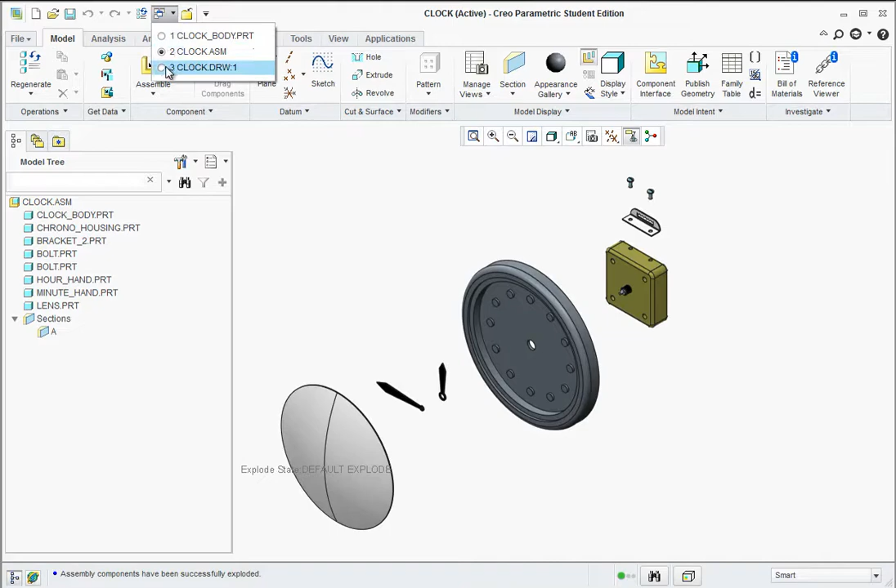Now we could go back up here and go to the clock drawing, and it should update the view.

Now the balloons—normally you have the BOM balloons in the table, and you'll be able to click on this and it will create the BOM balloons automatically for you. But here, you don't want to create reference balloons. You could go balloon note and put them in, or I can put them in manually. I'm just going to show this to you, but basically you would be able to bring in the balloons from the BOM.

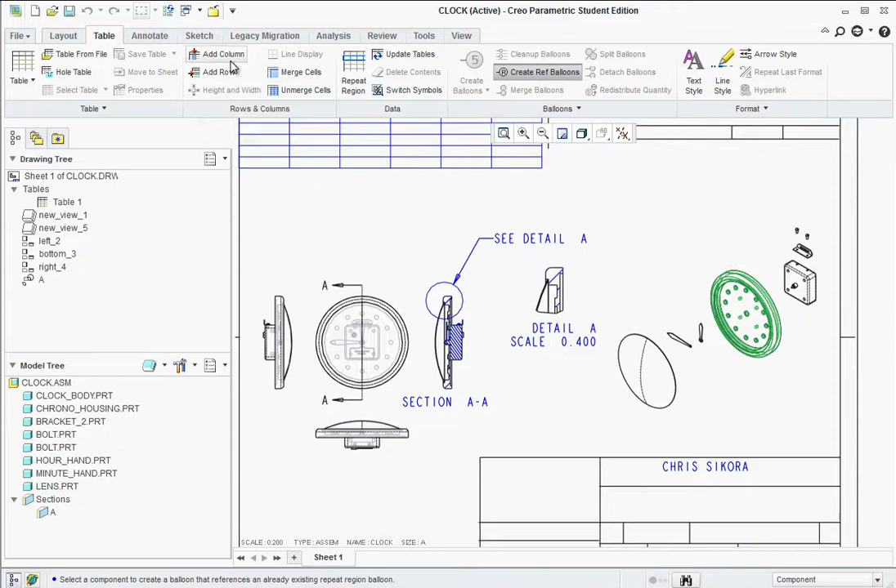If I go to annotate, I could just add them manually here. There's balloon note, and I want them with the leader. Hit select, make note, select an edge, hit done.

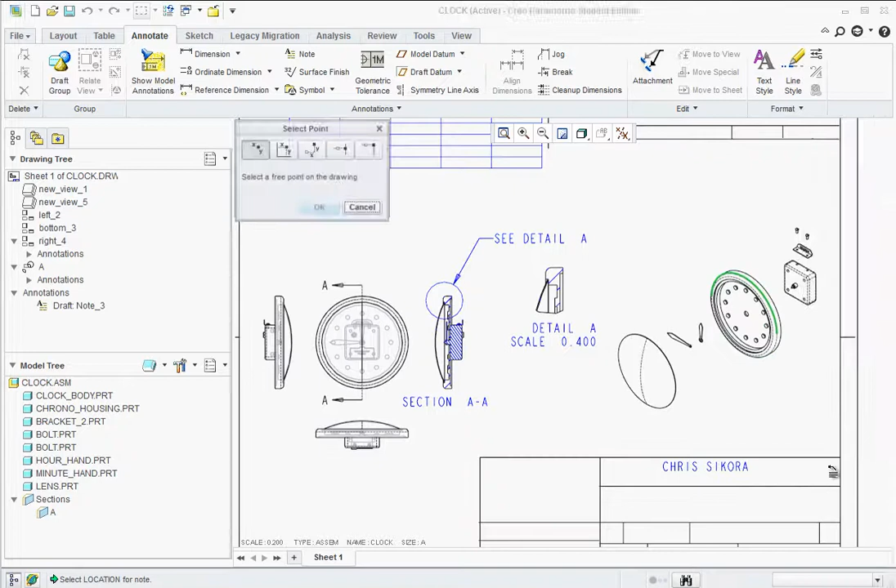Click where you want it, and I'm going to call this one—the clock—number 1. Green check mark twice, and it should create the note.

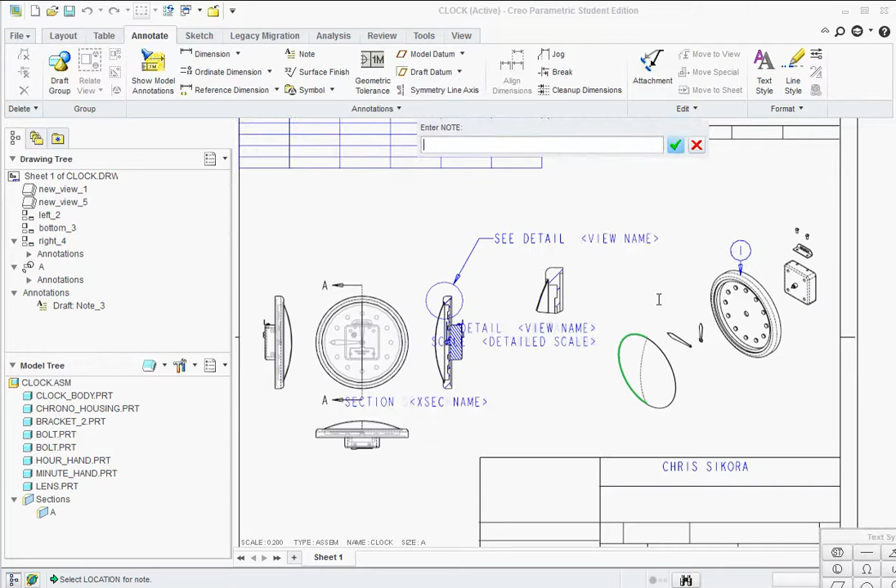Then again, make note, select this edge, done, click up here where you want to drop the note, and we'll call that part 2, hit the green check mark twice. Hit done, return. Basically you would have little notes for each one of those.

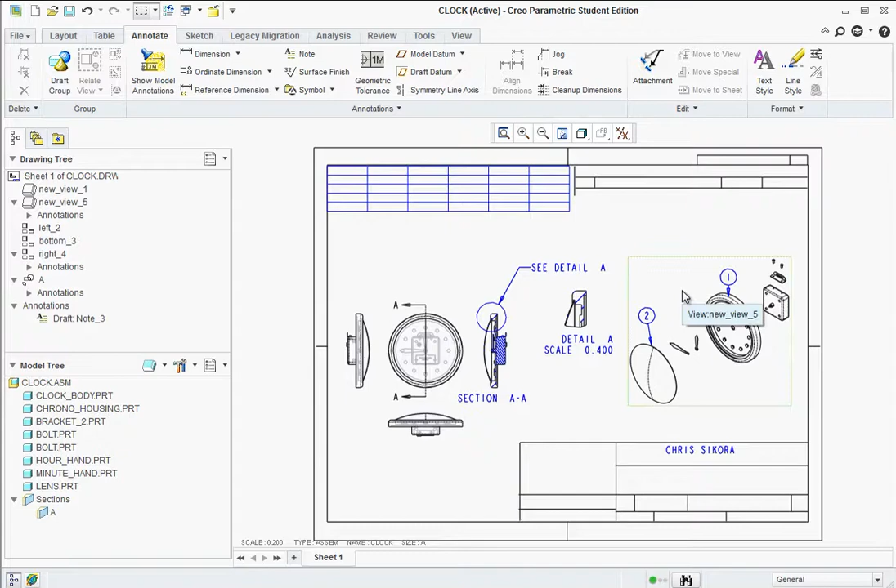Alright, at this point you just want to verify by looking at your test that it looks the same. As you can see, we have all the components: the detail view, section view, front, left, bottom. There's the bill of materials, and all the balloons are there with the name. Then just print that out.

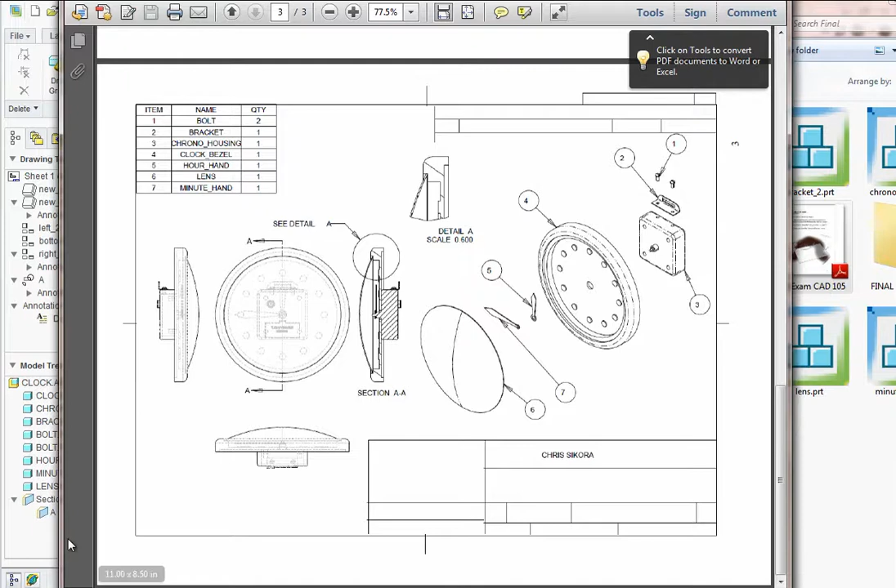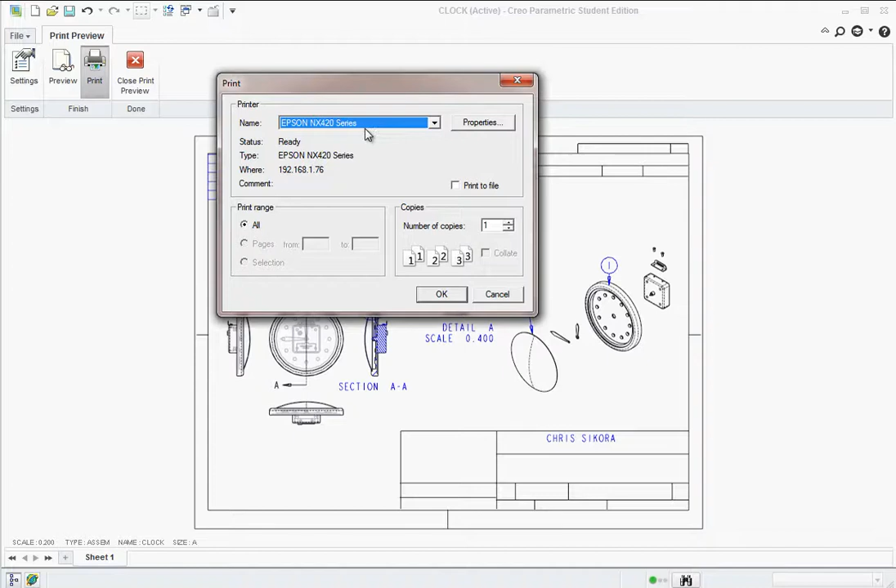So you go up here to File, go to Print, and you could do a print preview just to make sure it looks good. You'd hit Print, then here you'd be able to select the ATC 208 LJ 5200 and hit OK. And that completes the final exam.